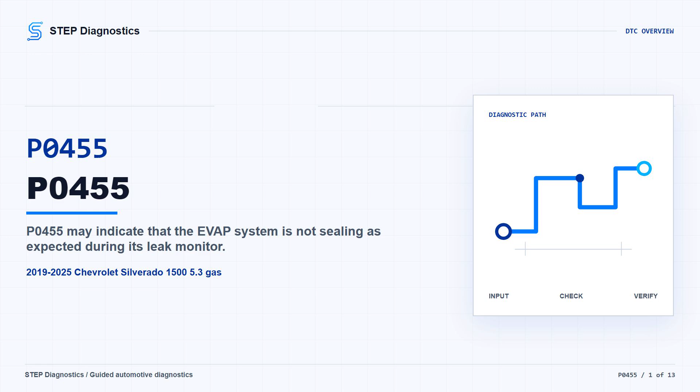On this 2019 to 2025 Silverado 1500 with the 5.3 gas engine, P0455 is an EVAP leak code. In plain language, the fuel vapor system may not be sealing the way the monitor expects, and the controller is seeing EVAP purge system leakage greater than a predefined threshold.

The driver may only notice a check engine light, though fuel odor can be possible, and drivability is often not noticeably affected. The broad areas to keep in mind are the fuel fill sealing point, EVAP hoses and pipes, the canister, the purge side, and the vent side.

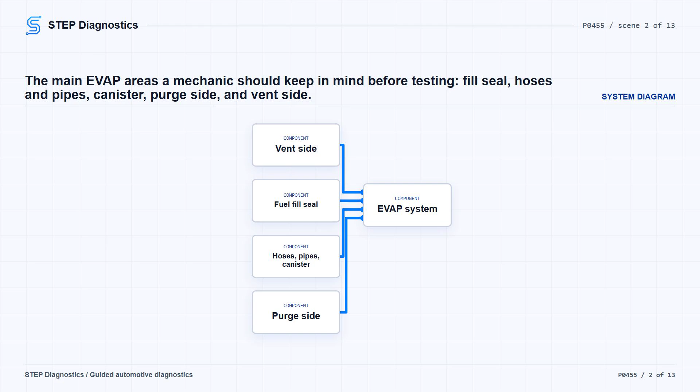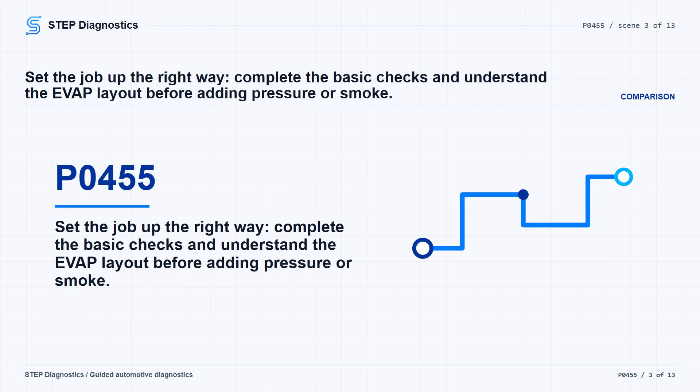Start with the basic system checks before you get into the EVAP leak test. If other codes are present, check what they mean first, then follow a structured diagnostic approach. Before touching the system, make sure you understand the EVAP layout well enough to know what you are sealing, what you are commanding closed, and where the test pressure or smoke is being introduced.

Now, do the first pass inspection. Check the purge solenoid, vent solenoid, canister, EVAP hoses and pipes, and the fuel fill sealing point. You are looking for anything disconnected, incorrectly connected, loose, leaking, kinked, restricted, missing, stuck open where applicable, or visibly damaged.

On a cap-style fill, pay attention to the cap. On a capless fill, pay attention to the filler door sealing area. If you find one of those conditions, repair it or replace the affected part as necessary before moving on.

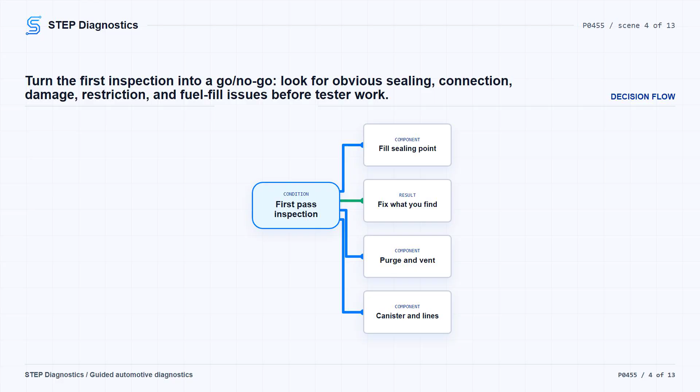If that inspection is clean, set up the GE41413A, B, or C EVAP tester. Review the tester safety information and operating guidance before testing. Make sure the vehicle underbody temperature and the tester temperature are similar. Completely unwind the nitrogen and smoke hose from the bracket so the tester can work correctly.

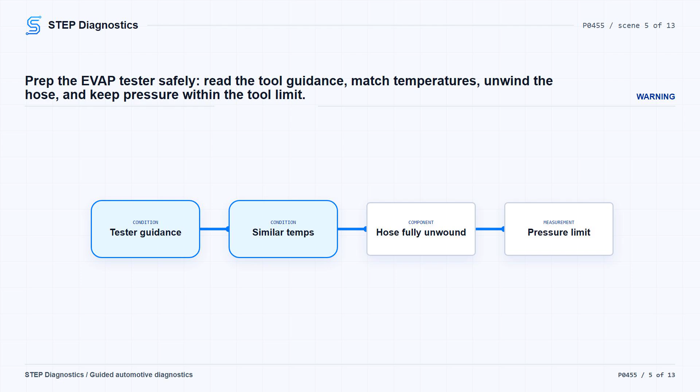Also, keep the EVAP test pressure under control. Pressure must not exceed 13 in H2O, 0.5 psi, because more than that can make system components act inaccurately. For the tester setup, install the hose at the test orifice, 0.51 millimeters, 0.020 in.

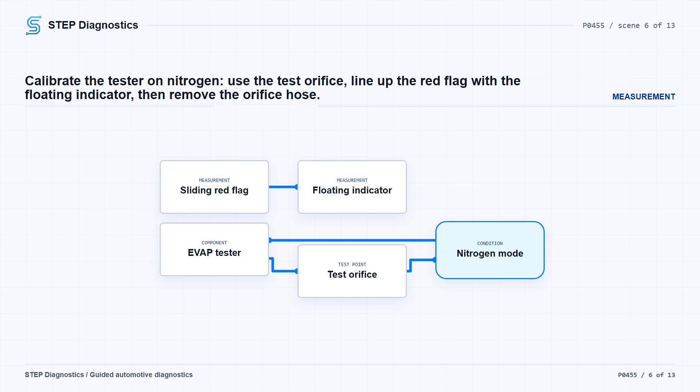Select nitrogen. Turn the remote switch on. Align the sliding red flag with the floating indicator. Turn the remote switch back off, and remove the hose from the test orifice.

Next, disconnect the quick connect fitting at the Q12 EVAP purge solenoid valve. Install the CH48096 EVAP service port access tool between the EVAP canister purge tube and the Q12 purge solenoid valve. Then connect the EVAP tester hose to that access tool.

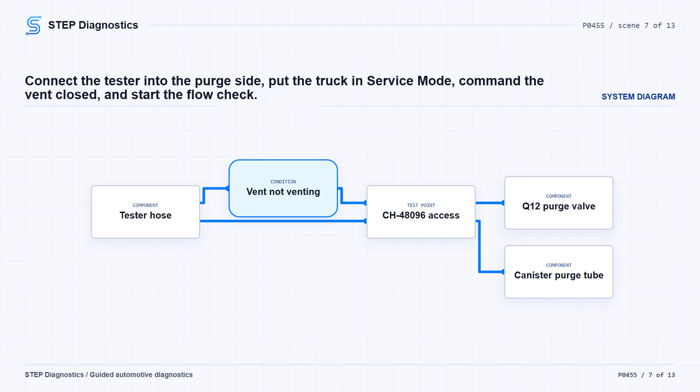Put the ignition on with the vehicle in service mode. With the scan tool, command the EVAP vent solenoid valve to not venting. Turn the tester remote switch on and watch the floating indicator. The expected result is the floating indicator below the sliding red flag.

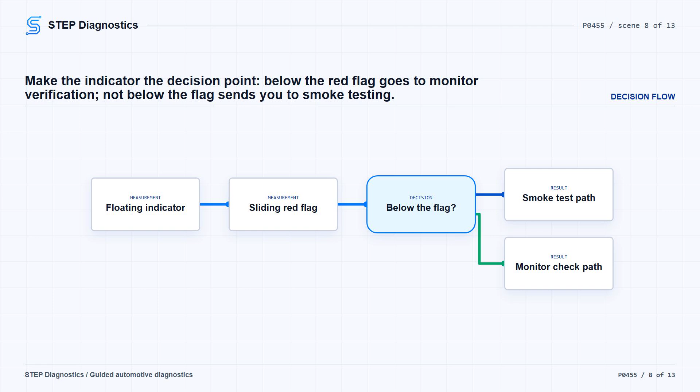Be patient here. Larger fuel tanks or tanks with lower fuel levels may take several minutes for the floating indicator to stabilize or for smoke to show from a leak.

If the floating indicator is not below the sliding red flag, turn the tester off and switch to smoke. When injecting smoke, remove the fuel fill cap or temporarily leave the EVAP vent valve open until smoke is observed. Then close the system. Confirm smoke has filled the system by opening it at the opposite end from where smoke is being injected.

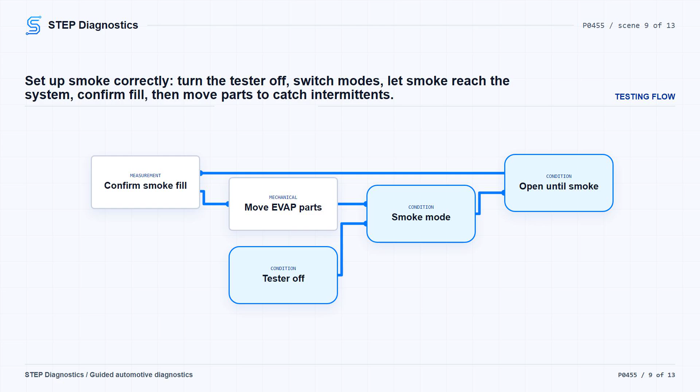For intermittent leaks, move the related EVAP components while smoke is applied. Then turn the tester on, use the high-intensity white light to inspect the EVAP areas of concern, and verify whether smoke is exiting anywhere. If smoke is coming out of a component or part of the system, repair it or replace the affected part as necessary.

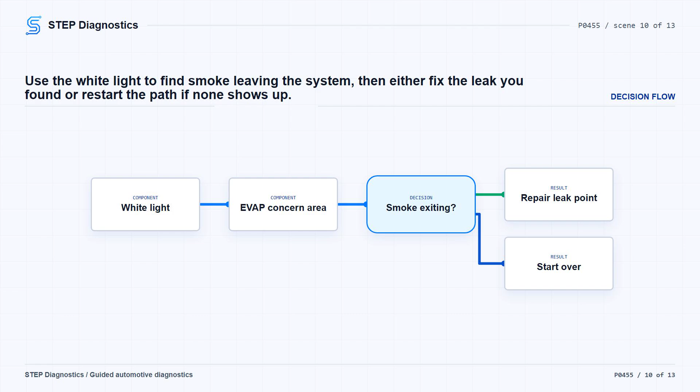If no smoke leak shows up on that path, go back to the beginning of the diagnostic path and recheck it, rather than guessing. If the floating indicator is below the sliding red flag, the leak test is passing at that point.

Now reproduce the operating conditions for the P0455 monitor, or reproduce the captured conditions, and verify that the code does not reset. Treat these as monitor gates, not a diagnosis by themselves.

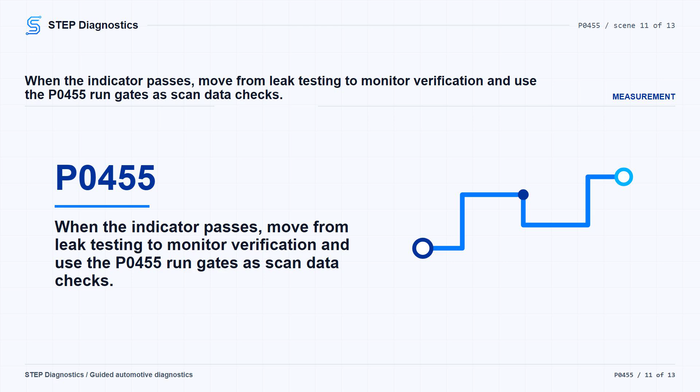Q12 evaporative emission purge solenoid valve flow greater than 2.0%. Barometric pressure sensor greater than 70 kilopascal, 10.1 psi. Fuel level sensor 10 to 90%. Ignition voltage greater than 10.0 V.

Startup engine coolant temperature sensor and startup intake air temperature sensor within 8 degrees Celsius, 14 degrees Fahrenheit of each other. Startup engine coolant temperature sensor less than 35 degrees Celsius, 95 Fahrenheit. And startup intake air temperature sensor 4 to 35 degrees Celsius, 39 to 95 Fahrenheit.

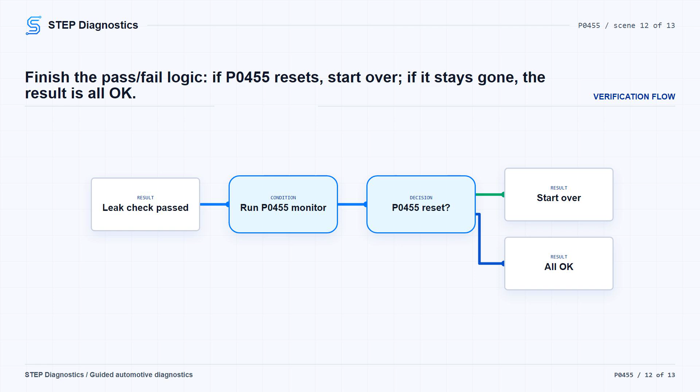If P0455 sets again, repeat the diagnostic path from the beginning. If it does not set, the result is all okay. After any repair is completed, verify the repair and confirm the code stays gone.

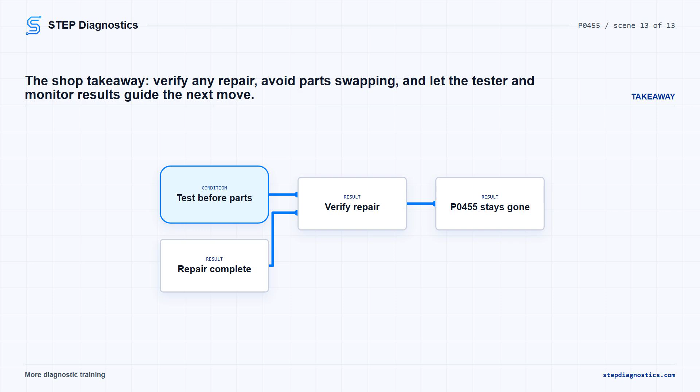Takeaway: do not part swap a P0455. Inspect the sealing points first. Use the EVAP tester correctly. Let the floating indicator decide whether you move into smoke testing, and then prove the monitor passes afterward.